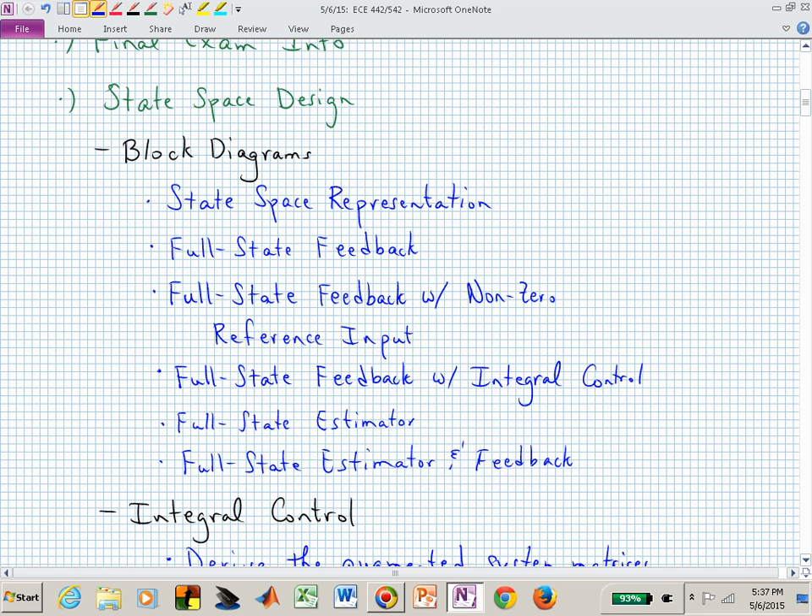Let's see what happens. And then we will spend a little bit more time on this integral control.

Wow, really? We are here until your homework is due. No, until your project is due this evening. We are here until 11:59 this evening.

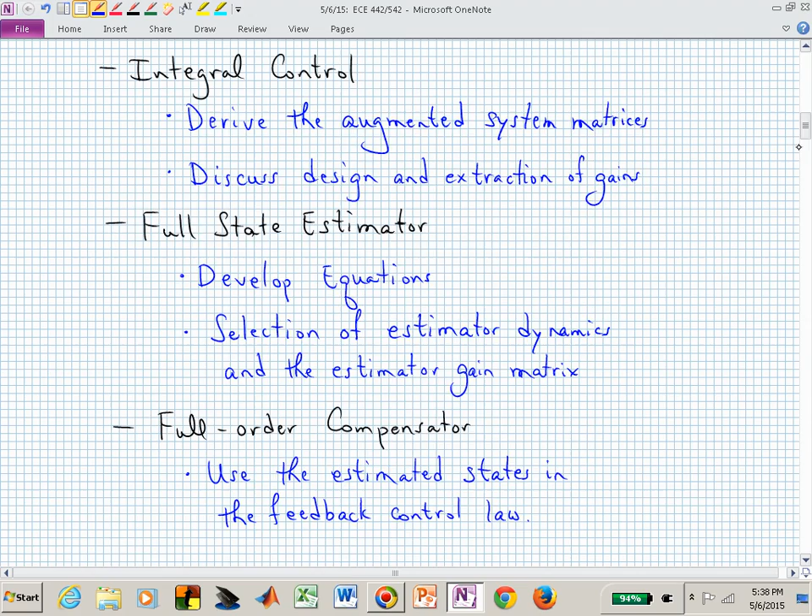We need to cover all of these blue lines, blue line specials. So we'll look at augmented system matrices, talk about where do we get the full state feedback gain, full state estimator, full order compensator. Wow, I'm tired just looking at that list.

Here's the final exam information. Here's the process that I hope allows you to not be quite so anxious when you approach the final. The final will be comprehensive. That almost goes without saying. By this point in the semester, I could ask you one question with 15 parts, and it would then depend on everything that's trickled back to the start of the semester.

The exam, you get one more sheet of notes, front and back, if you want. We've had 3 exams so far. This is the 4th exam. It's a 2-hour exam. You can have an additional 2 pages for your transform tables. That could be this Laplace and Z transform table where you have the different columns, one for Laplace and one for Z, and then the second page is maybe your Laplace transform theorems, maybe not your pairs of transforms.

You can bring in all your drafting equipment if you want, your protractor, your compass, your straight edge, your ruler. You can bring a graphing calculator. What you can't have are notes. In addition, you've already got 6 pages. That's enough to shuffle through. No books, no computer, no cell phone, no neighbor, etc.

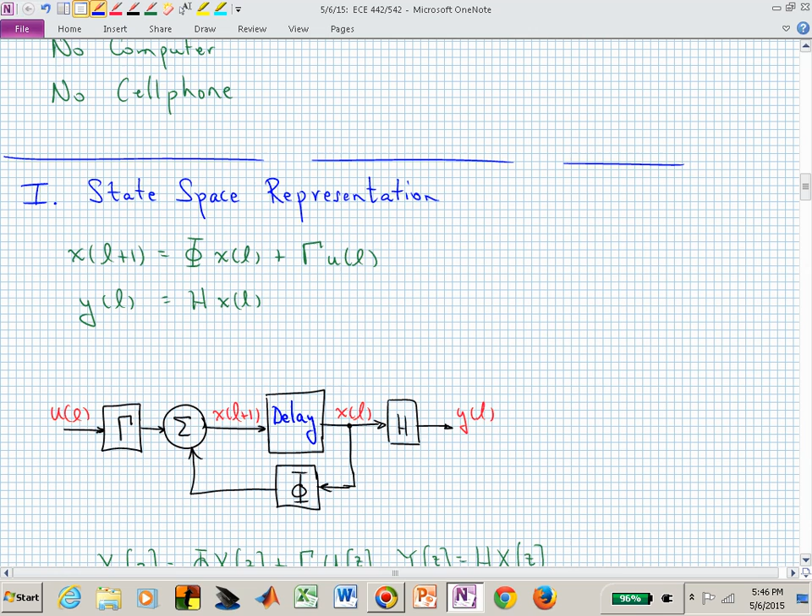And that's in the open loop. And not that you would need to repeat this derivation, but you should be very comfortable if somebody asks you to, on a napkin, derive that transfer function from the state space representation and give them capital G of Z. That's just the output matrix H times (zI minus phi) inverse times gamma. And the poles of G of Z are exactly the eigenvalues of this system matrix phi, the open loop system matrix.

You may not be happy with that system's behavior. And so we talked about, when we have a state space representation, applying full state feedback. In a block diagram, that red line that's feeding back to form your input into the system, the input u at time L, is just minus K x of L.

What's the main assumption that you're making with this scenario? What are you assuming is true? It's been a long day. What assumption are we making for that block diagram?

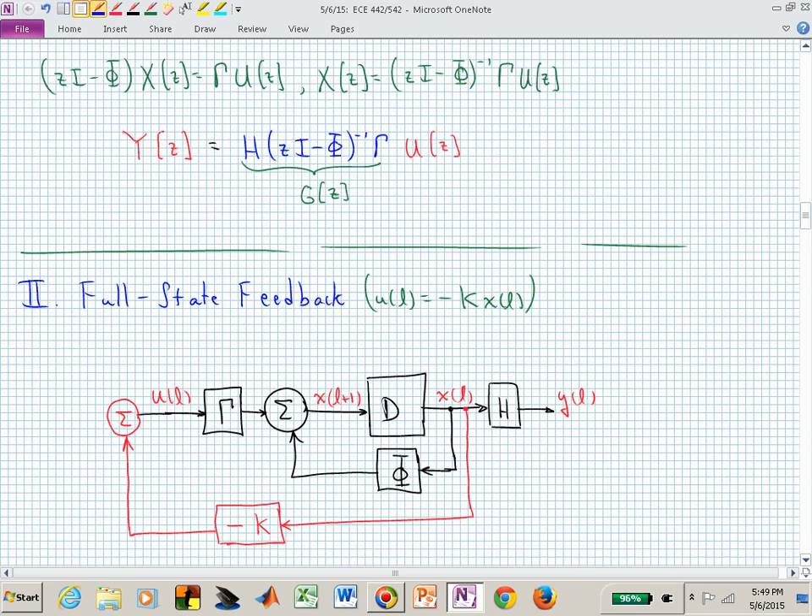You're measuring each one of those state variable components, scaling those by whatever values are in your feedback gain matrix K, and you're combining those in such a way to form your input into the system, and you inject that information in. Now you have closed loop dynamic behavior. If you weren't happy with the dynamics before, hopefully you can use K to force better dynamics.

The other assumption that I am making, if I can say you can arbitrarily locate the closed loop poles, what assumption am I making? Controllability. Is that system completely controllable? And you should know how to compute that. The controllability matrix, and if we have one input, now you have a square controllability matrix. You can just compute the determinant of that matrix to check controllability.

That was a regulator problem. That was basically full state feedback, nothing else. This is like putting some masses and springs together and pulling those masses in different positions and releasing them. It's an initial condition. It's a regulator problem. You're trying to drive everything to this equilibrium position of 0. That may not be what you want in most control configurations.

You may want to inject an external or a reference input. You want to add on to that full state feedback this second input piece, which is a reference input, scaled by some value, capital N sub 1. That leads to the following block diagram. It's identical to what you had above, except now you have this blue addition, which is the reference input.

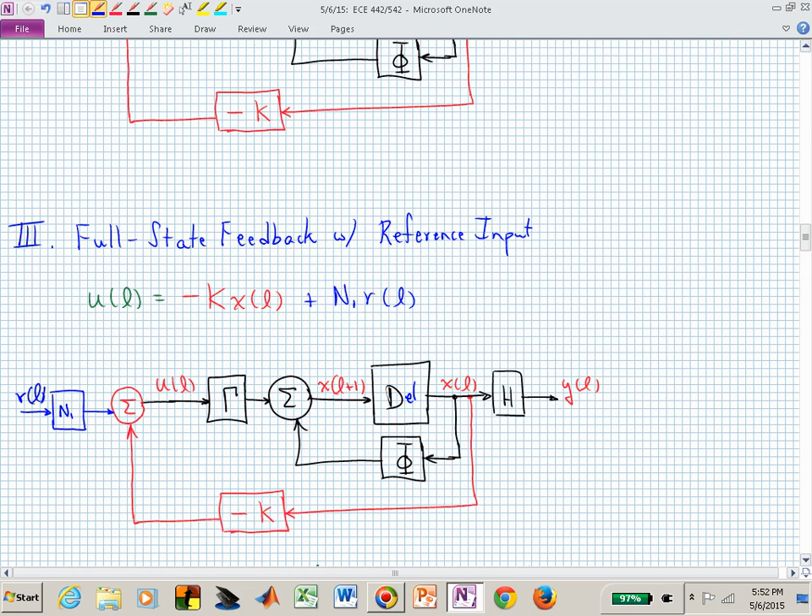And again, this is not a matrix, is it? That's just a bank of delays, that D block in all of these block diagrams. And you could then start working through those equations. But that block diagram sort of shows you how you are changing the dynamics, because now there's not just phi being fed back, now you're feeding back K as some linear combination of your states.

And that now comes into this closed loop system matrix phi sub C right there, by combining your terms that are scaling the state vector X. Now you could determine the dominant poles in phi sub C. Again, what are you computing if you wanted to know the dynamics of this closed loop system? Again, you're just looking at the eigenvalues of capital phi sub C, the closed loop dynamics.

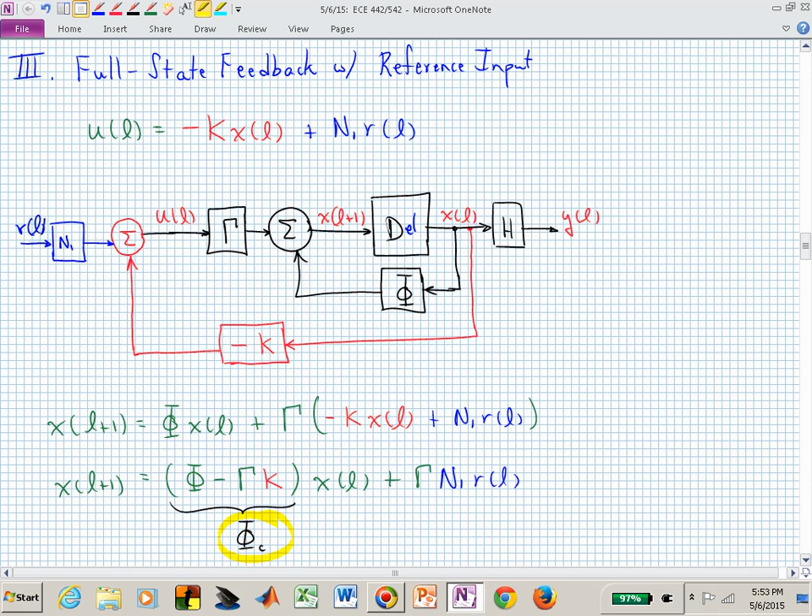Do you remember how we might have adjusted N sub 1? Here is our closed loop system written in the frequency domain, or trying to find a transfer function based on that second equation on the screen right now. You z-transform it, you linearly combine, and you solve for this transfer function between the reference input R and the output Y. And now T sub C of Z is this entire collection of matrices.

How would you select capital N sub 1? Or what are some reasons behind selecting N sub 1? If you wiggle R, what do you want to happen to Y in general? If you turn R to 5, what are you probably wanting Y to do? Probably follow that reference and go to 5 with particular dynamic behavior. If that's the case, if you turn R to 5 and Y goes to 5, how do you pick capital N sub 1? Or how would you describe that?

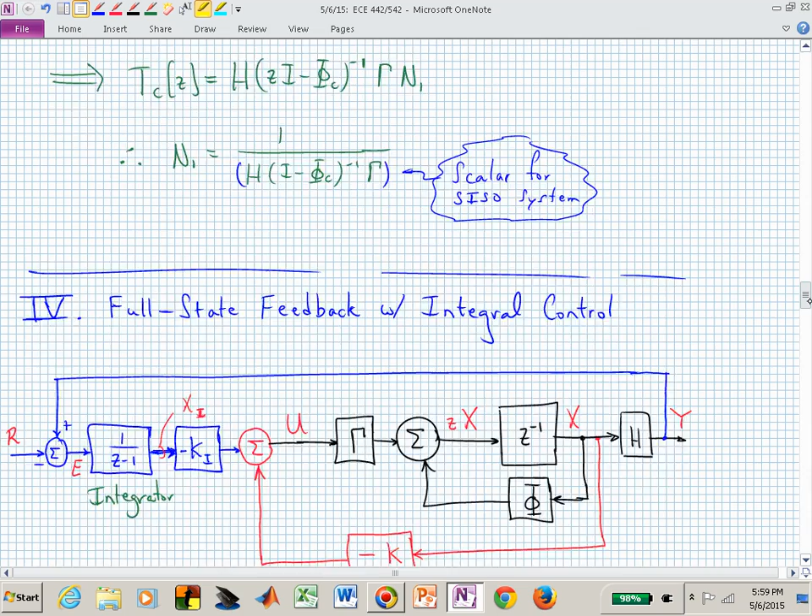That may not give you a very robust solution. If we go back here, and you've now selected capital N sub 1 to give you a DC gain of 1 in capital T sub C of Z, what's going to happen if, my system coming off the manufacturing line, my phi matrix was not like what I thought it was? There's some uncertainty in phi, or some uncertainty in gamma, or some uncertainty in H, my measurement matrix, or my input matrix, how my input is injected into my system. If there's uncertainty in that, the choice you made for N sub 1 may not actually give you a DC gain of 1.

If phi varies, or gamma varies, or H varies... I told it to go to 5 and it went to 4.276. Where did that come from? Well, there was maybe some uncertainty between what you thought your system was modeled as and what your true system was.

The way that we attacked that before was, this integrator was sort of nice. Having that pure integrator in our system allowed some slop in our poles and zero locations, and we could still always go to that value. For a constant input, we could always go to that value at the output. That's the reason we might want to now approach a problem by introducing an integrator into our state space representation or configuration.

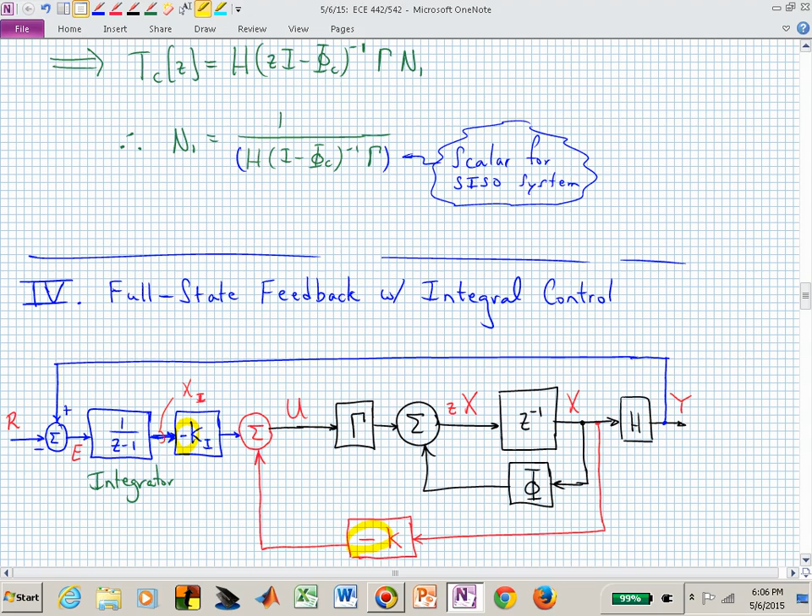And that's a little different. We're paying a little bit more of a price for this than that N sub 1, just the reference input gain. Now we've added in one more piece of dynamics, an integrator into our system, a memory location in a discrete time system.

And our control signal, U, coming out of that second summing junction is simply a linear combination of what we have been doing all along: a full state feedback, minus capital K x at time L, minus a gain on that integrator state, x sub I at time L. That's now our control signal. Questions on that?

I know we're going through this pretty quick, aren't we? But I want you to appreciate the power of an integrator. That's important, and you need to know that for this class, especially when you're designing a PI controller, a PID. That I is giving you this integrator. You need to be able to play with integrators there.

Here, I'm extending that concept to the state space design domain. When you graduate, when you finish school, somebody might start talking about doing state space designs, and they may say, oh, I need an integrator. And you go... kind of remember back in May of 2015 talking about an integrator. I was falling asleep during that class, but let me go see if I can find the notes.

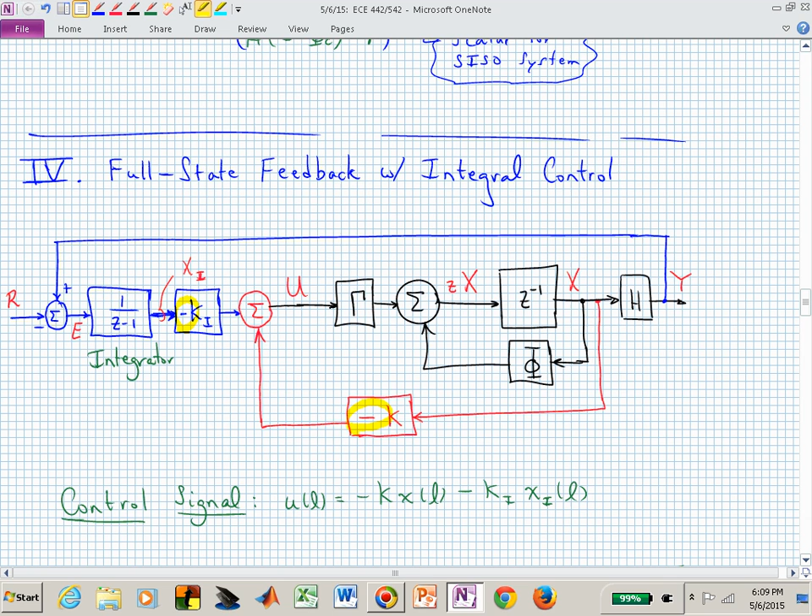Maybe you just want to measure one or two, or maybe one in this class. Y is typically 1. You linearly combine all of those states in your H matrix, and now you have one output. Can we still use some of these strategies that we've talked about? And the answer, the quick answer is yes. We don't have to throw everything away, even though maybe all what we can measure is the output.

And here's now what we want to do. We want to talk about how do we build an estimator, or somebody might call this an observer. This estimator is now going to try to produce or generate an estimate of each of these state variables, and we'll call that x hat at time L. X is the true system state. We are going to try to build an estimator that will basically produce a copy of x of L as a function of time.

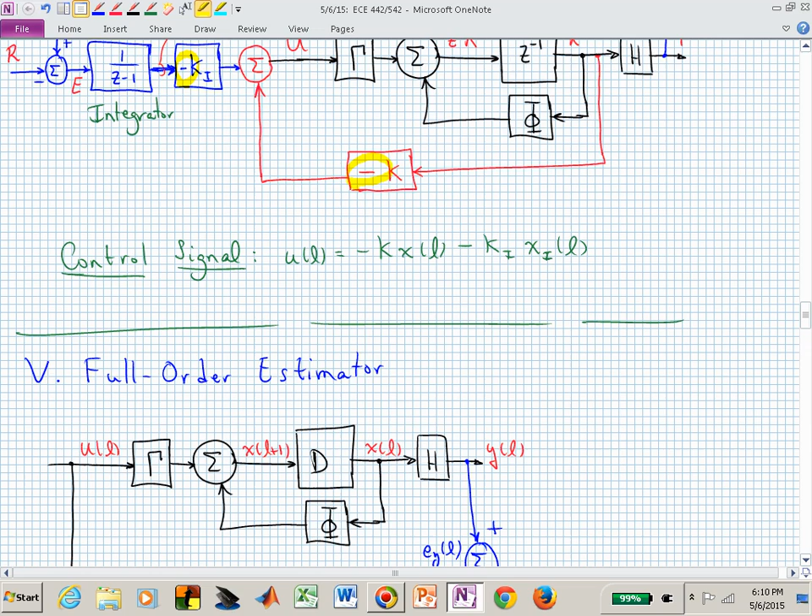If we're going to do that, it sort of makes sense to just copy the system dynamics. So if you can virtually erase or not see the blue lines, look at the two black pieces. You have the top piece, which think of that as the true system. And then you have the bottom piece. And what's the bottom piece? It looks exactly like the top piece, doesn't it? In terms of gamma, phi, and h.

But the one down below is the one that you have in your computer or in your microprocessor. That's a copy of what you think is in the real system. Here is, let's say, the system, the true system. And here is what we are trying to copy. The lower one is what we could actually build up. You could write those difference equations in an algorithm in your computer.

That's just a bunch of linear difference equations. That could just be a for loop saying x at time step now is a linear combination of these x hats and u's.

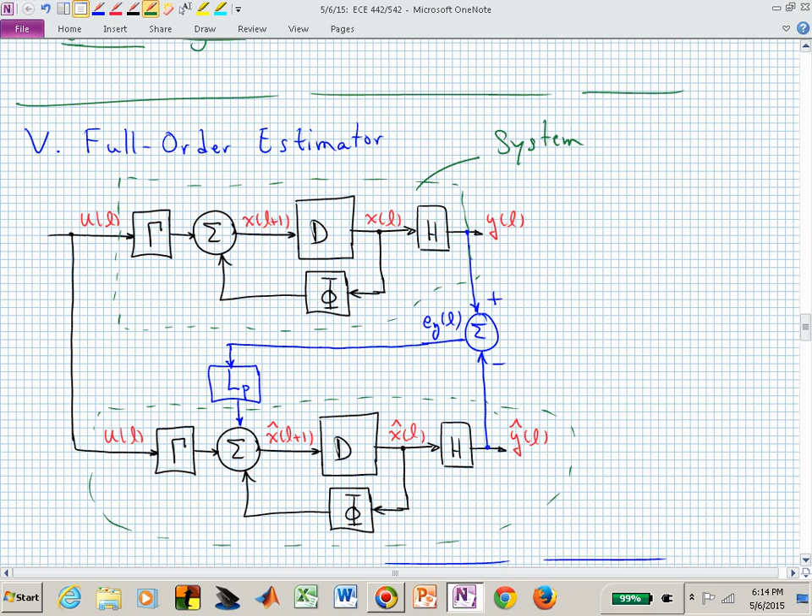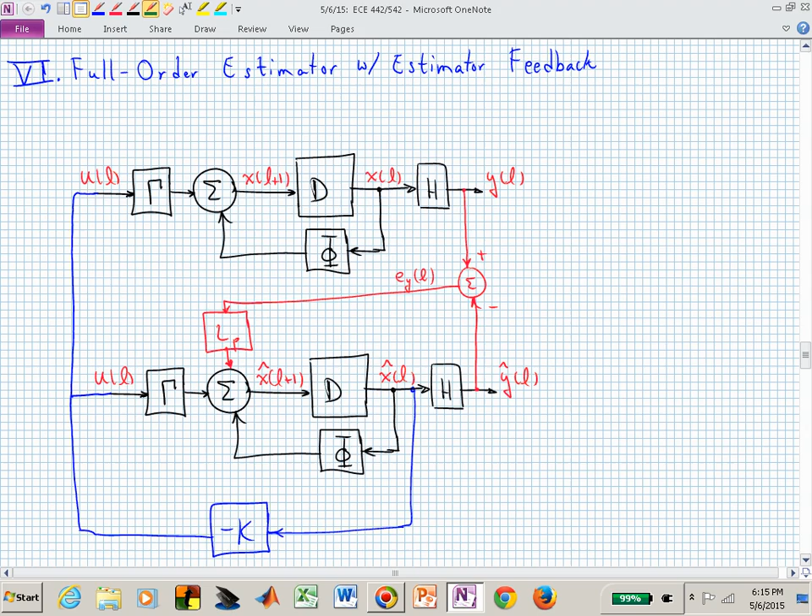Then what do we do? We probably want to control the system. Here, we weren't changing the system behavior at all, were we? We weren't trying to adjust the dynamics of that top system. We're not feeding back anything into U based on what's going on in the system. We probably want to change the system dynamics.

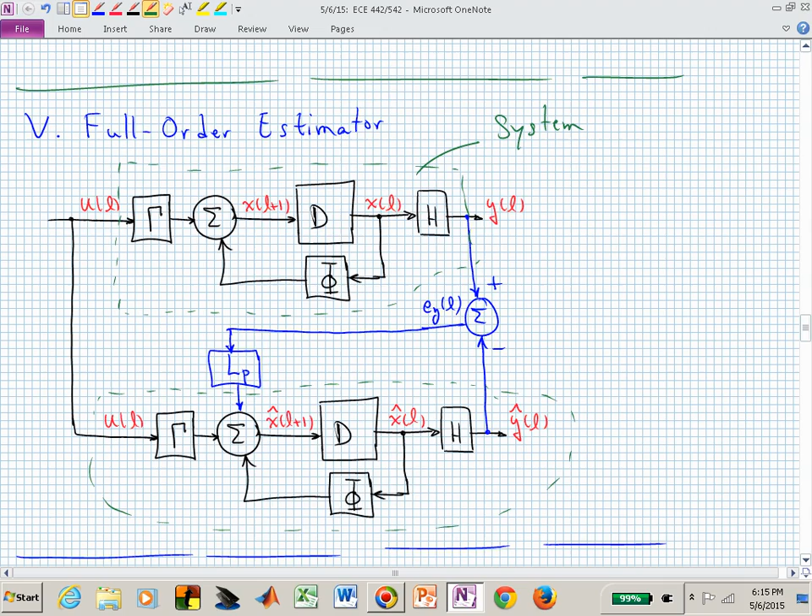Now that we have a copy of the system and x hat is tracking x, why don't we just use x hat as if it were the true state? We knew what we wanted to adjust, how we wanted to use the true state to feed back to form our input. Let's now use x hat as if it were the true state.

This is now a full order estimator - that's the bottom - with estimator feedback. Now you have an estimator problem to solve, to figure out L sub p, and you have a full state feedback problem to solve - that's capital K.

What's the relationship between K and L sub p? You probably adjust the dynamics of your estimator to be faster than your closed loop system dynamics. You want X hat to go to X quicker than maybe Y hat is moving to its final destination, or how Y is moving to its final destination. What you're really after is controlling that upper system.

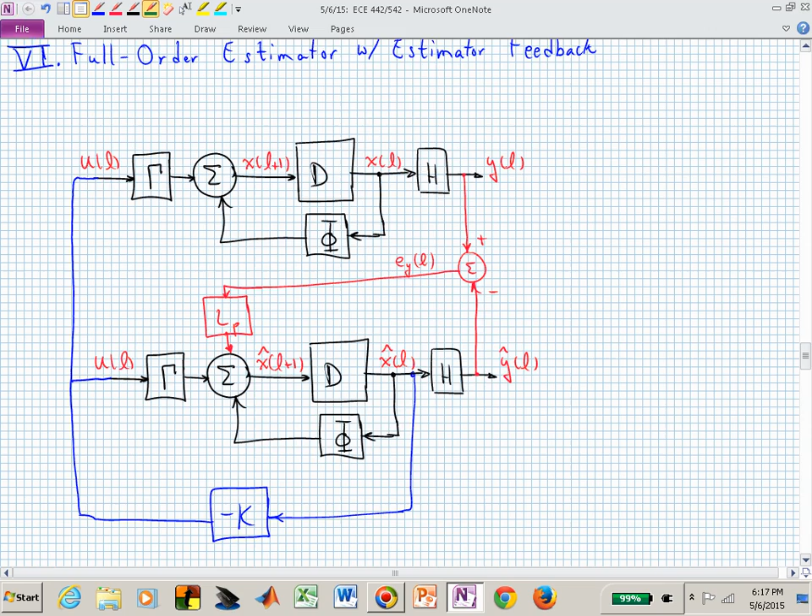Are there questions on what we've done? Yes. Pardon?

So the capital K here is doing what it's been doing so far this semester for you. It's adjusting the closed loop system behavior when you have full state feedback. Capital K is assuming your system is completely controllable, and it's now allowing you to adjust the open loop poles and push those or move those to desired closed loop pole locations. That's what K is doing.

The beauty of this design is that you can actually solve these problems in a decoupled manner. You can solve for the estimator gain L sub P separate from K, the full state feedback gain. You can still just put them together, and they will give you results consistent with the two independent designs. The full state feedback gain matrix, in this approach, you pick just like you've done in the earlier design that you need to know for the final. You pick K just like you picked it here, as if you had access to the full state. That's how you pick K.

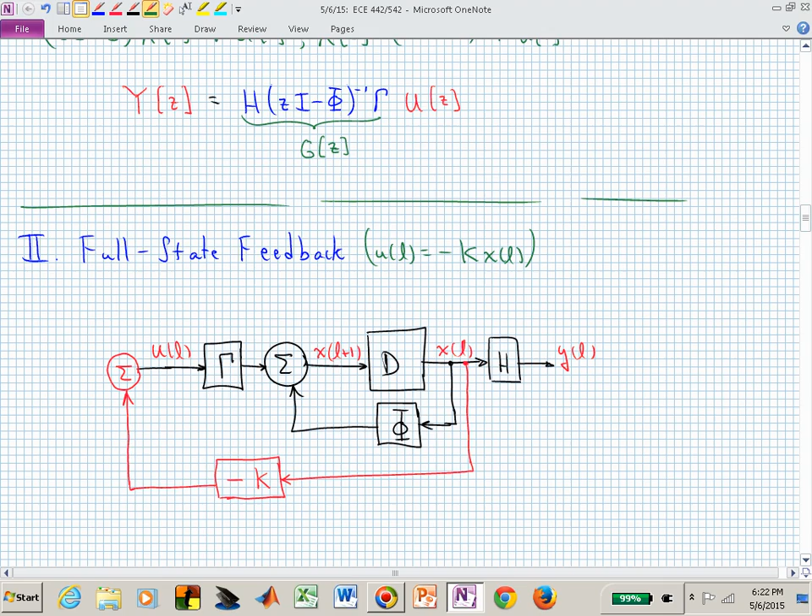Then, can I make things even more complicated? Now we have the estimator to worry about. Well, you've already picked K. Now the estimator is this L sub P. And L sub P is similar to K in that it's some matrix. It's a gain matrix. But now you pick it to be faster than all of your other poles in the closed loop because you want the estimator to get where it needs to go before you start acting like where you're at is the true state.

It's hard to grasp in 5 minutes. Okay, I apologize for that, but I want you to start thinking about this or sort of having a clue as to what somebody might be talking about if they say, oh, I need you to build a Kalman filter. Oh, I need you to build an estimator. I need you to build an observer. Let's see, something about the last lecture in 442, 542, we were talking something about that. Well, that's what this is about.

Now let's say that all of your poles in the closed loop system were at a radius in the unit circle of 0.5 or larger. Now you would probably locate your estimator poles, the L sub P gain you would pick to be inside that small circle. You want them faster so that you have X hat going to X much more rapidly than Y is eventually settling to a final value. The reason for that is if you had X hat going to X slower than you were trying to command X, it's never going to catch up.

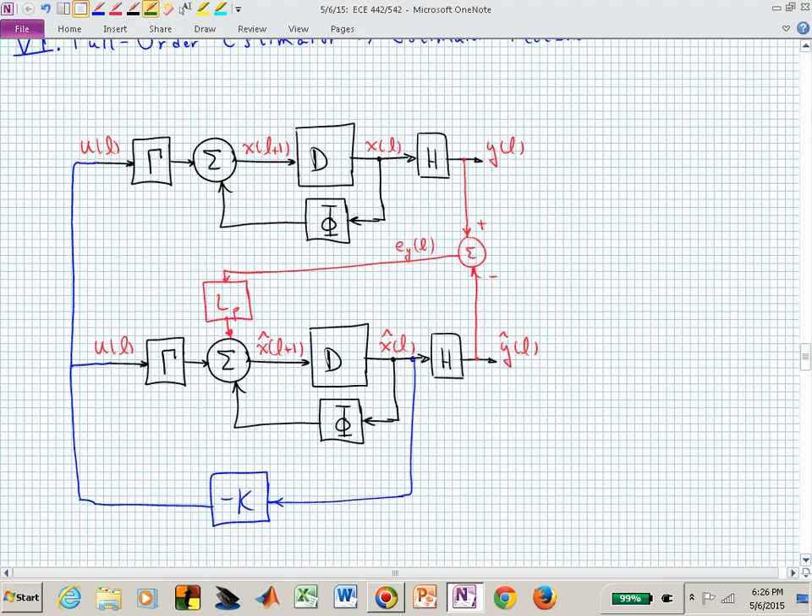Okay? But let's now go through maybe in a little bit more depth what integral control might look like. So now we sort of stepped back again into this integral control. Why do we want integral control? Do you remember? Zero steady state error. Integrators are good for giving us good steady state accuracy.

What we want to do now is figure out how do we change this into something that we already know how to play with. Can we put this into a state space representation that makes us feel warm and fuzzy? What's the warm and fuzzy state space representation we know? x at time l plus 1 is equal to phi x of l plus gamma u of l. That makes us feel good, right? Can we make this look something like that? And that's what we're trying to do.

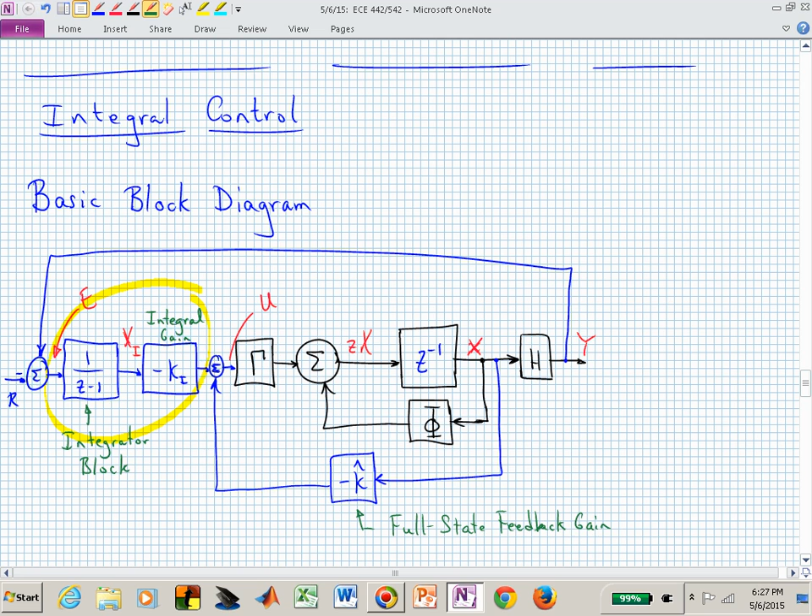But now our phi matrix will be a little different. Our gamma matrix will be a little different. But if we can put it into that structure, then we're back to where we started. And we can be happy. That's where we're trying to go now. So let's, with this block diagram, figure out how to make that happen. We're going to try to have full state and integral gains incorporated into this.

So let's now see if we can implement this or find a way that's consistent with what we've talked about this semester last week in trying to find the original K, the full state feedback gain matrix. Can we use that same strategy to find K sub I and K hat, where K hat is now what we used to call K? It's kind of a curve, but bear with me.

What we want to do is figure out how do we model that integrator in the time domain. This is a review for the final. If I gave you that piece that's circled in yellow and said, give me a difference equation for that piece in my block diagram, you should be able to do that. That's just going from the frequency domain into the time domain. And that's one of our square dances, right? How do you start with a transfer function and get to the time domain difference equations?

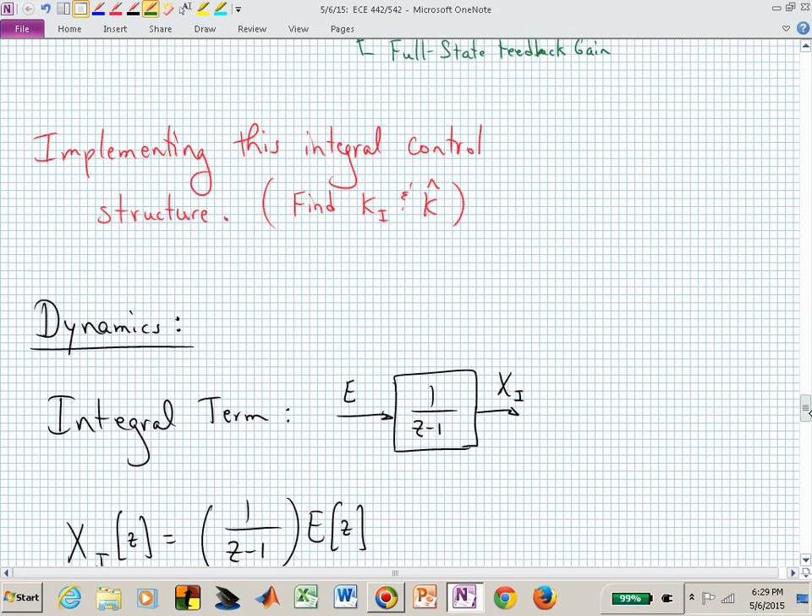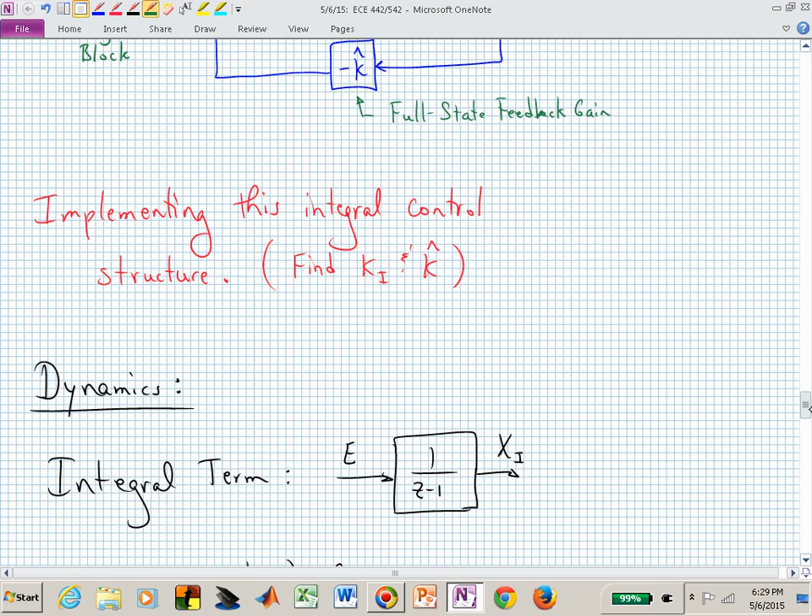That's what we want to do because we already know the time domain of the black piece. That's just our normal expression. Let's now see if we can go from frequency domain to time domain for that little piece, and here's that little piece extracted from the big block diagram. Does that look like what was circled in yellow before? There's my transfer function, 1 over z minus 1. Does that look like this transfer function between e and x sub I? That's the connection I'm trying to make.

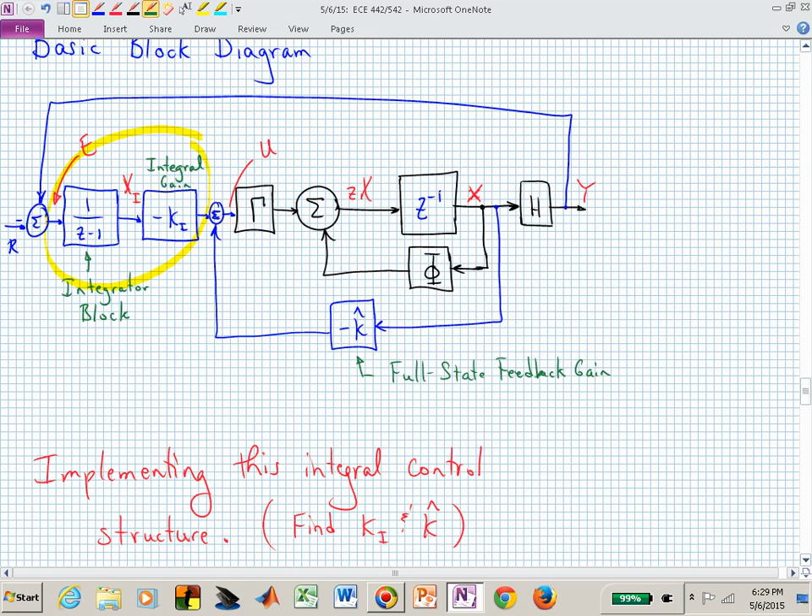I want to put that into the time domain. That now should look just like that. There's e, there's x sub I, and they are related by this transfer function, 1 over z minus 1. Where's the pole in that transfer function? Right at z equal 1, right where we want it. That's our integrator. Now we want to take this into the time domain. How have we done that before? Our output is capital X sub I of z. That's equal to a transfer function times an input. And here our input is E, the error signal.

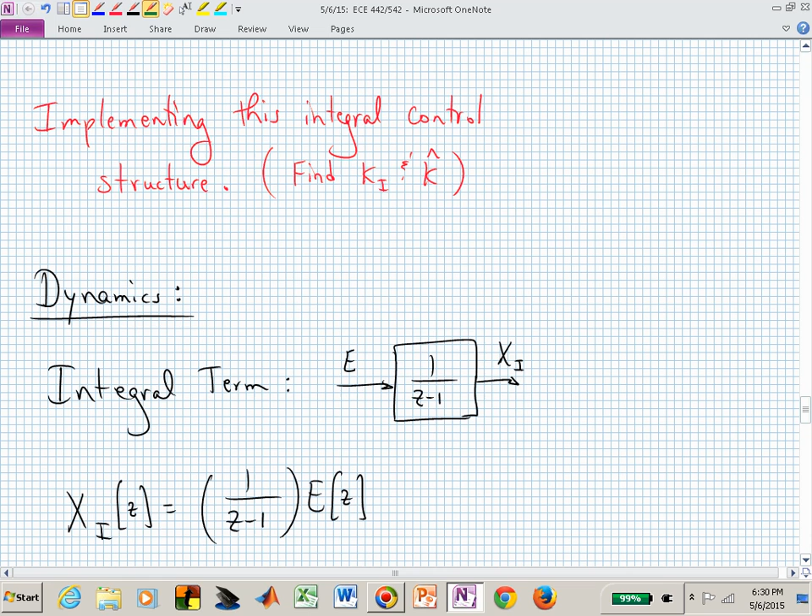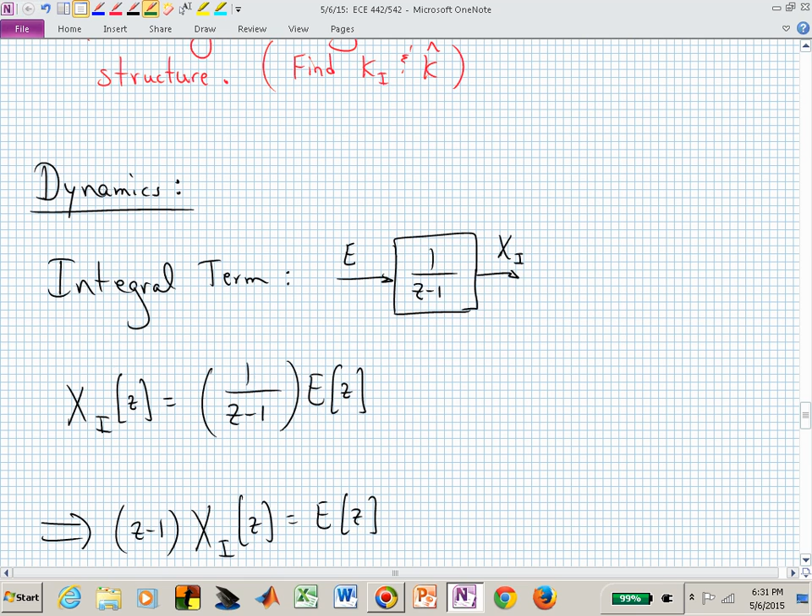We can multiply both sides by the denominator expression, which is z minus 1. Is everybody still with me? This should be just a review. Now do you see how you can take this into the time domain? Remember what z is as an operator. Z is just an advance in the time domain. Just like playing with s's in the Laplace, now you should be somewhat comfortable playing with z's.

I'm doing this in small steps. We now have that z and minus 1 distributed across capital X sub I. That's our new variable that we want to take into the time domain. And there we have it. We have little x sub I at time step n plus 1 minus little x sub I at n.

Oh, I told you I wouldn't use n's, didn't I? N is saved for Nevada. That really changed things, didn't it? Didn't. But at least you're not confused with n being the dimension of the state vector. Now our time variable is l, and this you should feel fine.

What is this doing? This takes the error now, adds it to the state of that integrator now, and that generates the integrator's output one time step into the future. And what's an integrator doing? If you had to go back and teach Calculus 1, or maybe it's 2 that you start talking about integrators. First semester calculus, you're always just differentiating. Second semester, you're integrating. What's an integrator do? It's the area under a curve, isn't it? This is a numerical way of doing that. You're finding the area under this error curve.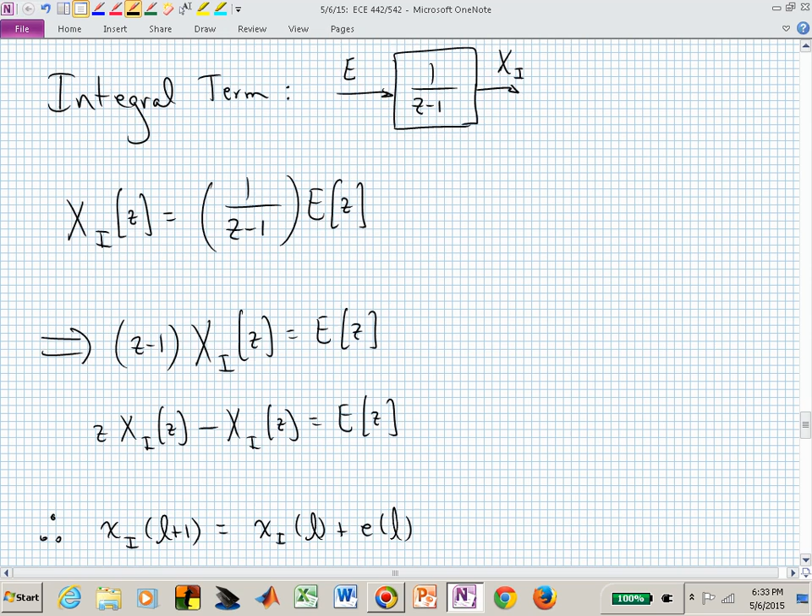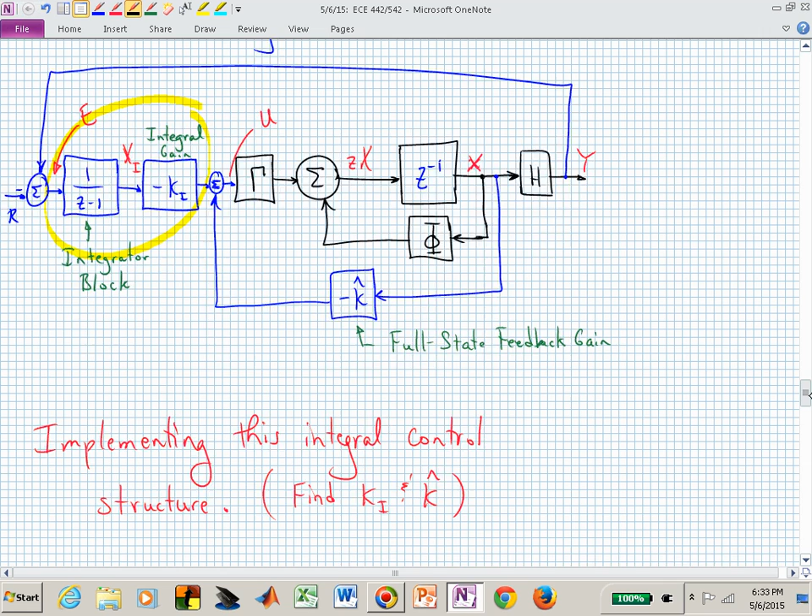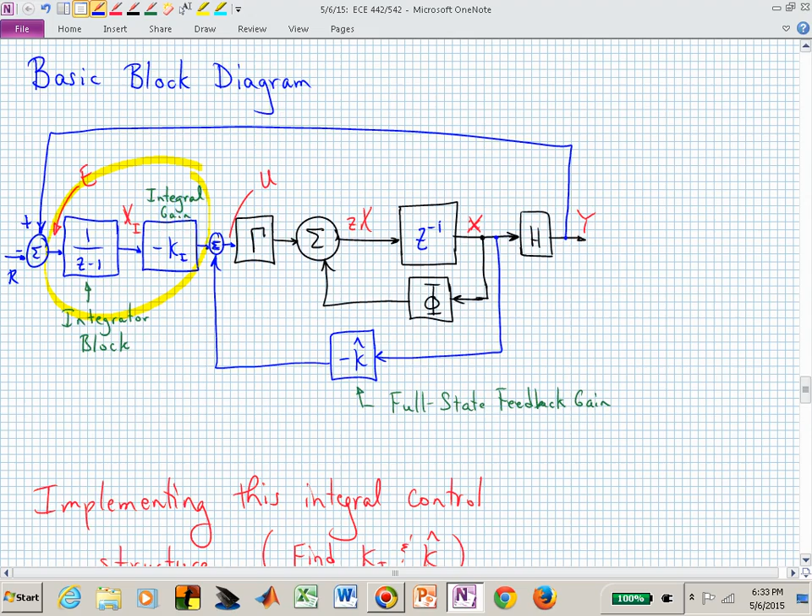That's all this is. You're just adding up that error. And if you drive the error to 0, that's going to be a good thing. That's what you're wanting to do. Now you have to remember how we defined that error back in our block diagram. Remember, I did a little bit of a different behavior here. Here was the plus from our output, and then we subtracted R from that. So our error signal E was Y minus R. And that's what I'm using here. E is Y minus R.

But what's Y? That's the output, but that's related to our state through the output equation H. Y is just Hx, and R is R. So we're subtracting that from Hx, which is just Y.

Oh. What's that about? Have to go back and erase, don't I? At least you're following that much. Might as well just keep my eraser handy.

The error signal now is just the output minus the reference signal, and the output is just H times x minus R. So now if I use that in E right here, that's what the right-hand side is doing. This is now E of L.

So little x sub I at L plus 1 is just x sub I, the time step before, plus the error. And the error, we've constructed it in our block diagram to simply be Y minus R, and Y is just Hx. Now we basically have the equations that we need. This is the dynamics of one state variable component. It's written in terms of the state and the new little component x sub I and the reference input R.

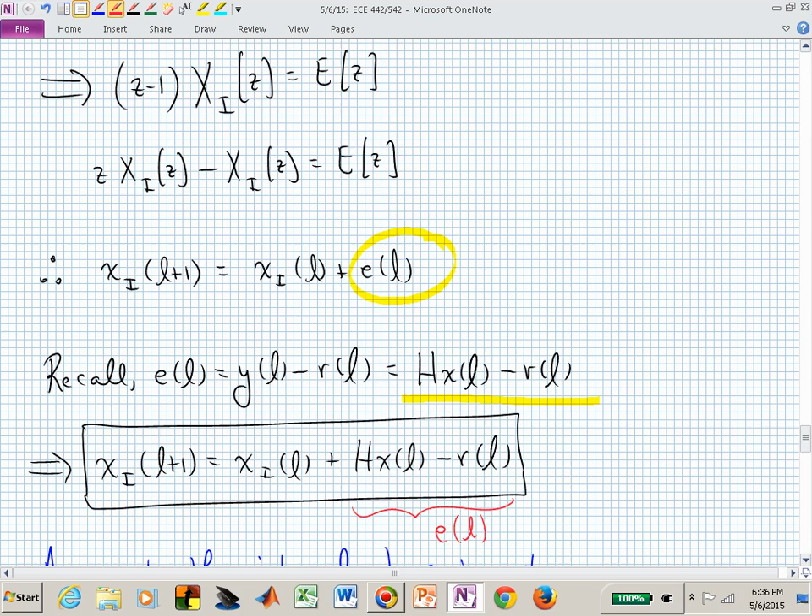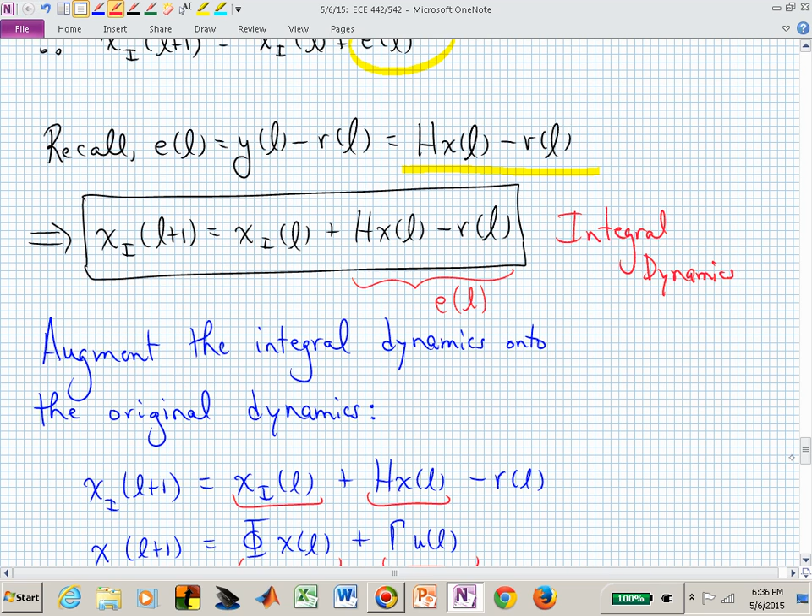We can use that together with little x equal phi x plus gamma u. So I'm saying we can augment the integral dynamics, these are the integral dynamics right here, onto the original dynamics. The integral dynamics, that's the same as the boxed equation, isn't it? Little x sub I at time step L plus 1 is little x sub I plus Hx minus r. And our original system dynamics were just x at time step L plus 1 is equal to phi x of L plus gamma u of L. We comfortable with those two equations?

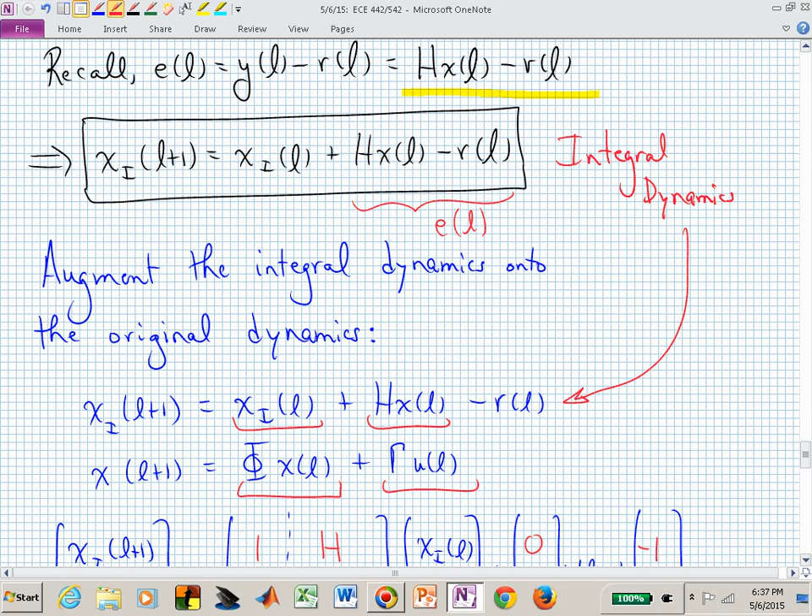Those x's may not be the same size, are they? Little x, think of that as 10 rows tall. How tall is little x sub I? How many integrators did we introduce? One, didn't we? So little x sub I is just one variable, whereas x is 10 rows, potentially. Let's now put that into some matrices, and that's what I'm doing here. I'm creating an augmented state vector. I had x originally. I just added on top of that.

Obviously, I'm hungry. So here's my analogy. I went to Baskin-Robbins and I had a two-state ice cream cone. I had strawberry and vanilla. Those are my two states. What did I do? I put one more state. What kind of ice cream do you like? Strawberry? No, I already had that, didn't I? So now I could have another flavor, pistachio. So I now have strawberry, vanilla, pistachio as my integrator.

You see what I'm doing with my state variables? I had two to begin with. I asked for a third scoop. That was my x sub I. That's now my new state variable. That's my augmented state variable. It's now 3 flavors tall. I started with 2 flavors and I added one more. I could have started with 10 and added one more. I could have started with 5. That's my original x, and I add one more. Is it clear what that augmented state vector is doing, what it looks like?

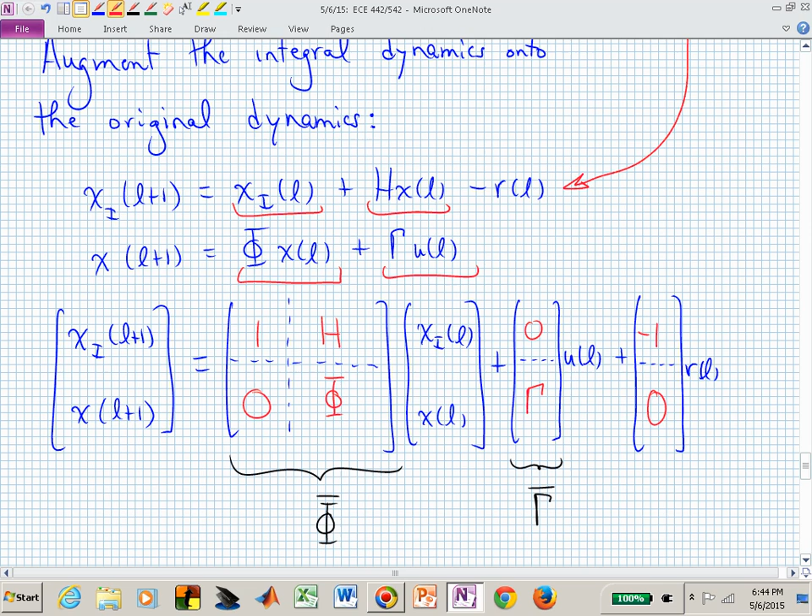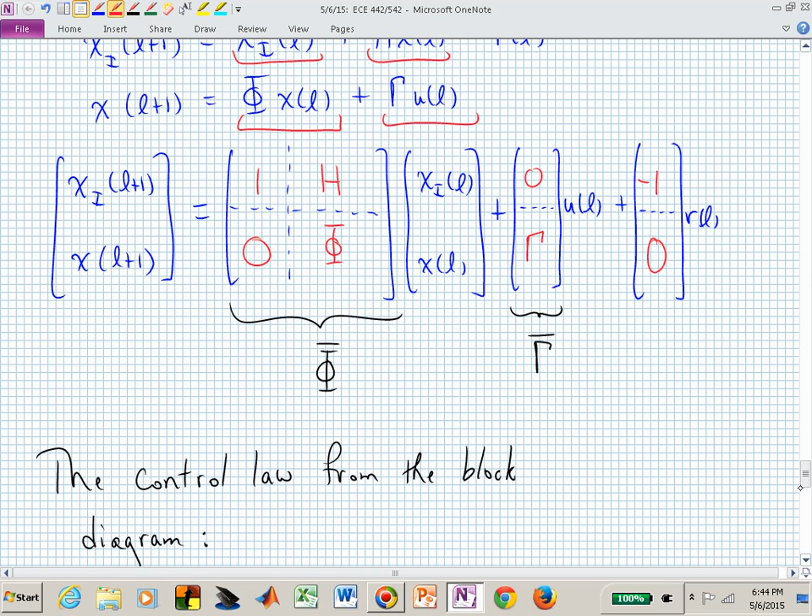Do you see how we would build a full state feedback controller now? We want to change the dynamics of phi bar with the choice of little u, the input. And we have access to x sub I and x. We're assuming full state feedback. Now we have k hat and k sub I from this. What's the dimension on k bar? If we have one input, k bar is how many rows tall? Can you represent it with your fingers? Let's say our state was 10 to begin with. We have one row if we have one input, right?

And how many columns is k bar? It's 11 columns wide. What's the dimension of k sub I? It's one row tall. How many columns wide is k sub I? It's compatible with little x sub I. And how many components were in little x sub I? 1. So k sub I is 1 by 1. K hat is 1 by 10. That's the original size of our full state feedback gain matrix when we didn't augment in the integrator.

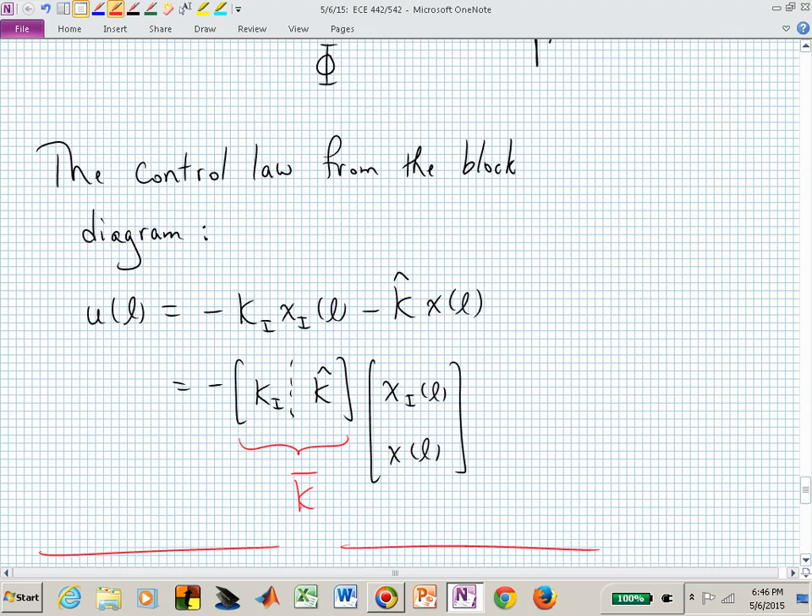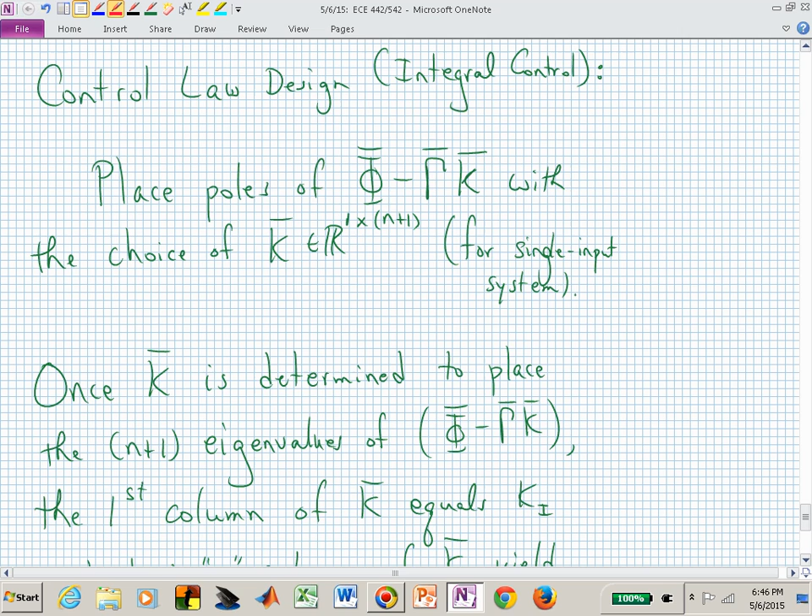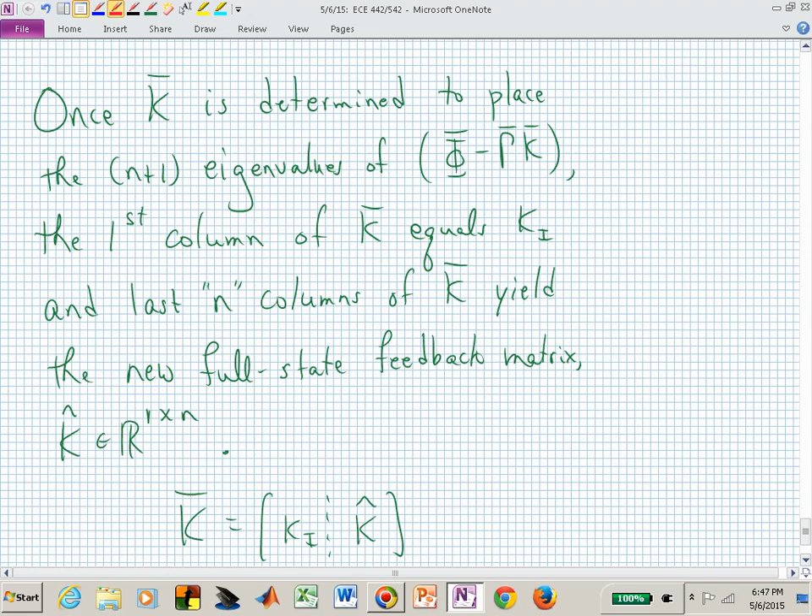So here's the words that we'll finish with. Here's our control law design. Using integral control, we would place the poles of phi bar minus gamma bar k bar with the choice of k bar, which is 1 by n plus 1 in dimension. Once you've found k bar, then you simply partition k bar. You just pull off the very first component of this 1 by n plus 1 row vector, and that becomes your k sub I. The following n columns make up k hat, which you now put into this block diagram.

What do you need to know? The material for homework 8. You won't need to know integral control or full state estimator, but you will need to know full state feedback with a reference input, little n sub 1, which was basically way back in the first 6 minutes of today's lecture. But I didn't want to tell you that, or you would have zoned out even more before now.